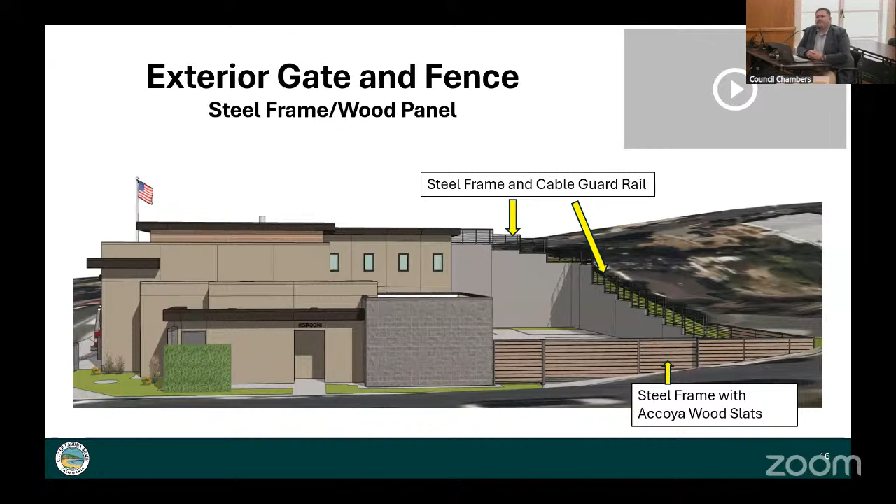Along Fifth Avenue and a short portion of Virginia Way is where we have the steel frame with the Accoya wood slats. This photo provides our detail of what that gate would look like. Unfortunately, I couldn't find a photo from the front of the gate, but this gives you an idea of what those horizontal slats would look like. There's a small gap in between each slat, but it is the steel frame. That is the proposal along Fifth Avenue and that short portion of Virginia Way.

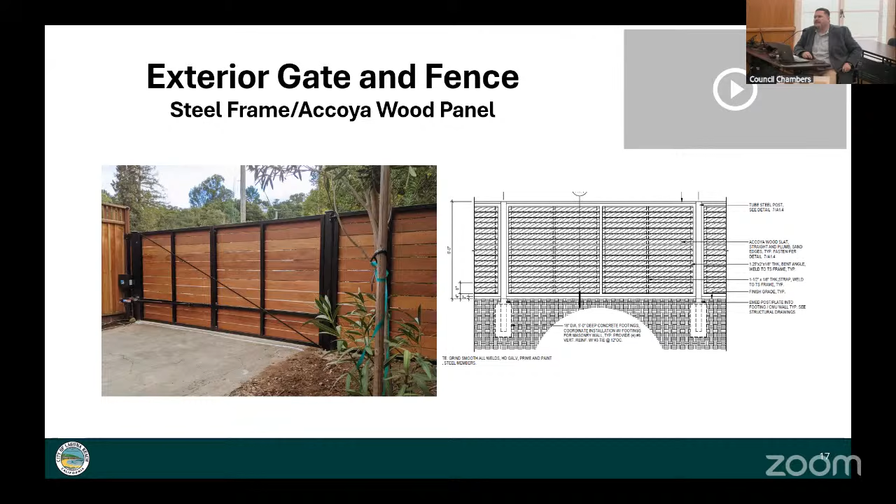Is this the same wood that would be on the building? It would be the same wood if we go with the Accoya wood. But this looks like a completely different color. It is, yes, I couldn't find a photo of that exact wood in this application. So this isn't an actual photo of the Accoya wood—this is more a representation of the horizontal slats with the steel frame.

The question on the proposed perspective view was about the way the aluminum siding was shown, and how that works along the edge of the building. So I was able to find this photo taken that shows that perspective view with the staking that was done on site. It's very hard to see, but I did point to it in yellow. I wanted to trace it, but I wanted you to also see that this was the staking. So we feel that view is an accurate representation of what you would see from that angle.

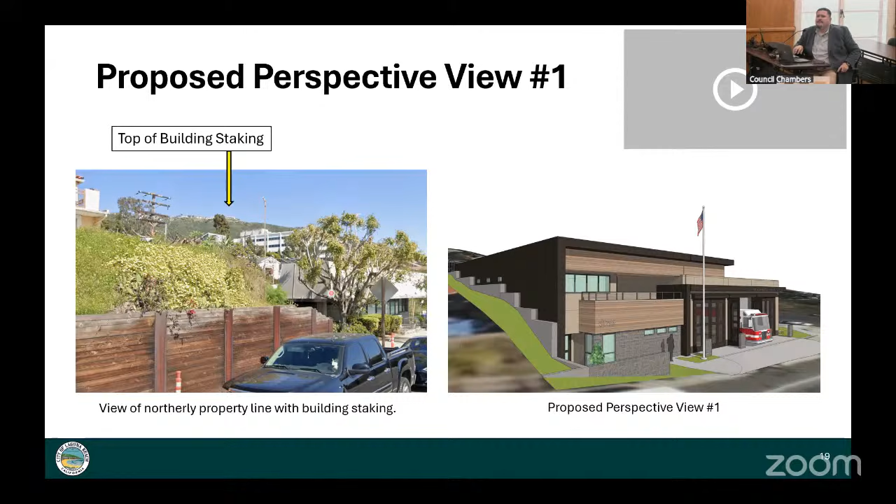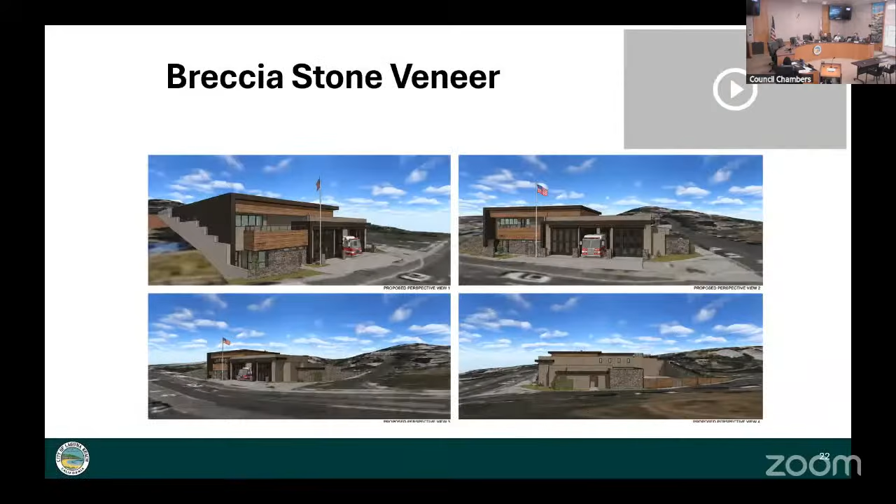Thank you. Questions from the commission? That was a very thorough presentation, Tom. I think you picked up everybody's comments.

I'd like to start with the landscape plan. It's very general. There's no spacing shown for any of the plant material, no numbers of plant materials in the plan provided, and in fact there's no landscape architect shown on the plan itself. So this is more of a concept review, and there's a lot of input on changing up some of the plant material, adding new species and deleting some of the species. In that case, what would happen in the process? Would the landscape plan come back to the Planning Commission?

That's a good question. As originally contemplated, it was left to the approval of the city manager. But I do understand, and I guess one of the things we're hesitant to detail too much is that there's still a chance for change depending on what that public art looks like. That's why we were keeping it general, to understand what that palette is and then further detail it. That was some of the hesitation about detailing it too much, since there's a significant portion that stands to change, that's not the design being provided by our landscape architect.

Among other things on the landscape plan, where is the water quality area located? It's not identified on the plan. I can bring that up. So that's in this little finger just behind and to the left of the gate into the back. Okay, so it's that little planting strip, and then there's the tree adjacent to it. And so is that intended to retain water? That's to meet our water quality requirement to treat the water on the site, so we would be draining to that area and then pump the water out.

Okay, I think you've raised a lot of good questions that we can get into discussion about, but those are my questions. Thank you.

Tom, in regards to the potential of changing from the block to the stone veneer, how does that affect the actual construction of the sub wall or whatever you want to call it? Because with the block, you don't have a separate structural wall, and I'm assuming with the veneer there would be a 2x6 or some kind of internal structural wall that the veneer would go up against.

Yeah, I think just because we are so far through the design, we would likely just change that to a precision block, a standard gray block, and then apply the veneer on top of it. So you're feeling that there's a potential of just not being able to have enough material to do all the replacement of all the split face block.

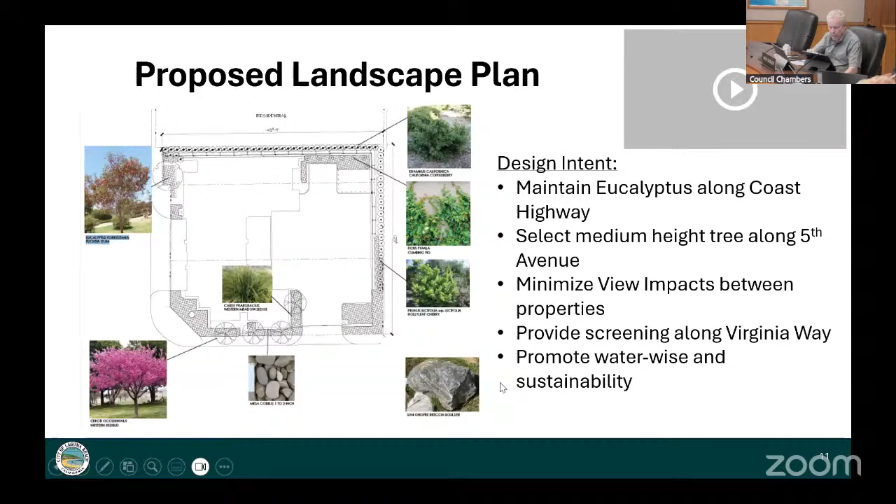Okay, and then I'm looking at - I'm not sure if you can bring this one up - but it's perspective view number 3, showing the corner of Fifth Avenue and South Coast Highway. When you were discussing the possibility of having some of this block with the real San Onofre breccia stone veneer on it, you were possibly suggesting maybe just doing it on that garden site wall, which, looking at perspective number 3, would be the one facing South Coast Highway.

But I'm wondering, looking at what's there on that elevation facing Coast Highway, if they were to use some of that stone veneer on that site wall, that garden wall, and also at the front door entry wall, and the other wall facing South Coast Highway closest to Fifth Avenue - that's not all block wall, but changing that front elevation so the block wall all has the veneer on it - do you think you'd be able to source enough to get those three expanses of wall covered with the veneer?

It would be speculative, but I could commit to having that be our primary goal. Okay, because I just thought maybe that would be a good compromise. That answers my questions. Thanks.

Commissioner Goldman, do you have some questions?

Yeah, I have a question, Tom. You've mentioned availability of plants as a potential issue, and availability of some of the materials. Is that related to what's going on in the world right now, that inventories of materials are diminishing, or is it just regular old supply and demand? In other words, is it an extraordinary potential for unavailability, or is it kind of normal course?

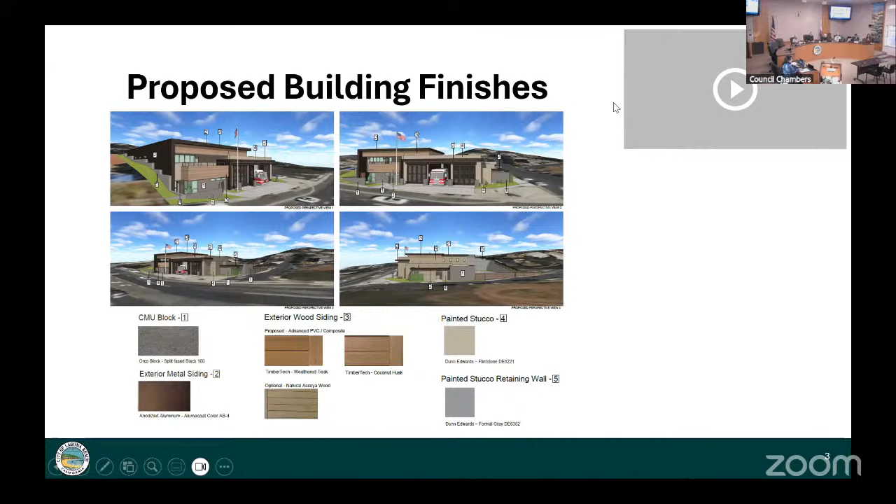Okay, well, I'd also welcome comment from the public on that. So we'll now conclude planning commissioner questions and go to open the public hearing and ask for comment from the public. Three minutes each, please.

Hello, James Henry, Vice President of South Laguna Civic, local designer, South Laguna resident. I've been involved with this project since its start, and I want to thank Tom for all the meetings we've had and the input that's been taken. I do think the building has come a long way, and I think we're at a point now where these final details are critical in helping to differentiate it from a building that might be in Aliso Viejo versus something that belongs in South Laguna. And I think we can do it.

I would say the breccia stone - there's a guy in town who was a big excavator, and he collected all this stone over the years. If you've been around old Laguna houses, most of the old walls and retaining walls are built out of this stone. It's used in the transit stops and light standards in our section of town. It would continue that fabric into the building. I think there's probably enough stone that we could make it work.

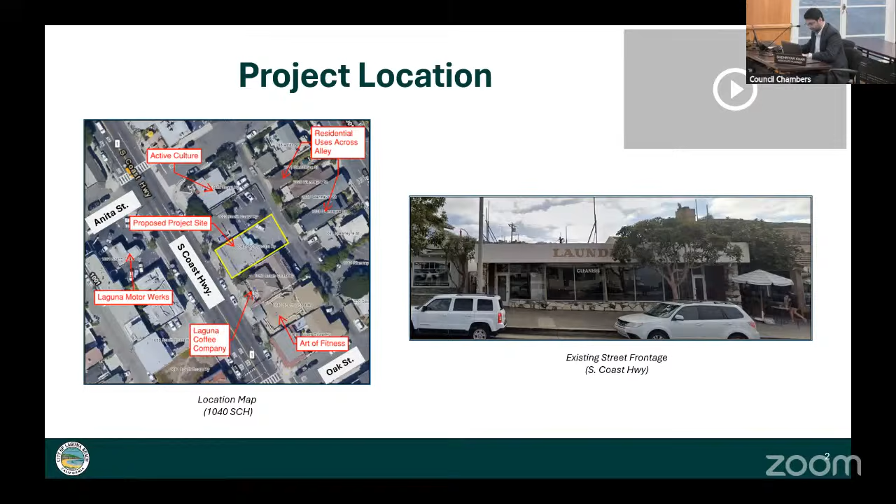The project has a history before the Commission. In July 2025, the Commission reviewed and approved Design Review 25-1044 and Coastal Development Permit 25-1045 for a mixed-use project involving a major remodel of the existing building, a second-floor addition with 4 one-bedroom apartment units, exterior facade improvements, elevated decks, parking lot upgrades, and landscaping. The Commission approved the project on a 5-0 vote on July 16, 2025.

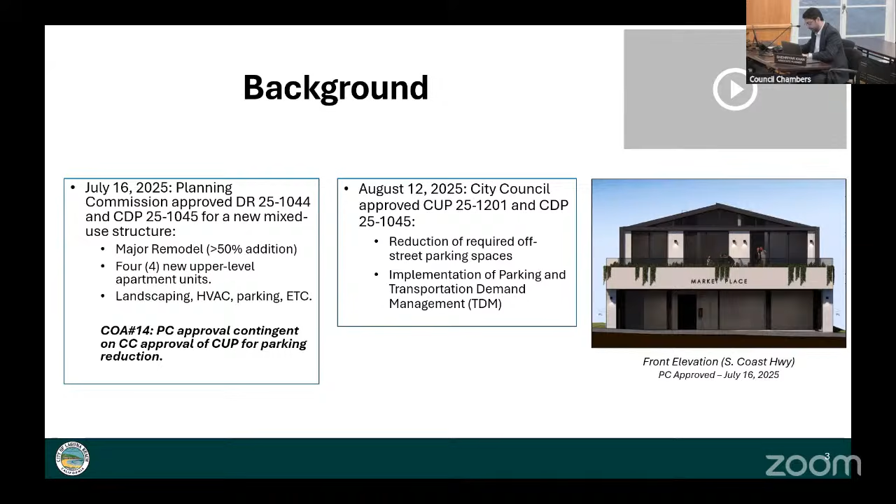The City Council subsequently approved the associated conditional use permit for a parking reduction on August 12th, 2025. These are the plans approved by the commission last July.

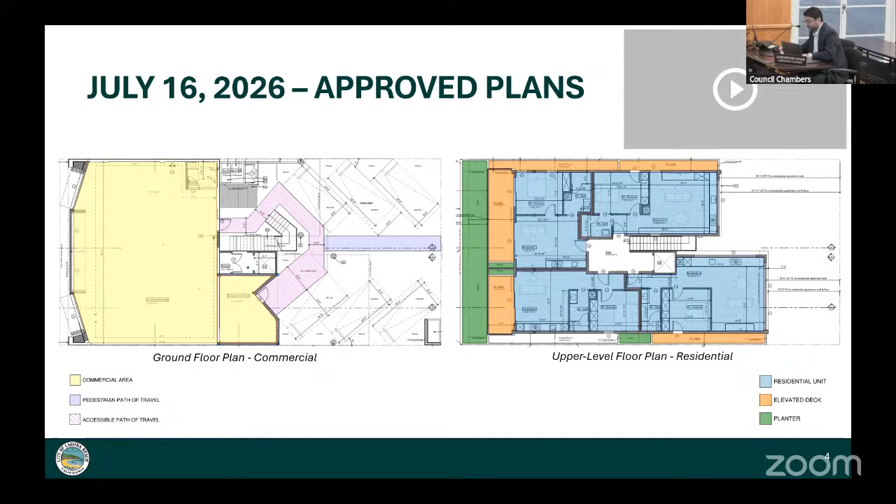The ground floor commercial area is 2,275 square feet, and the upper floor added 2,427 square feet of residential space, configured as 4 one-bedroom apartments with a combined deck area of 630 square feet and a combined planter area measuring 326 square feet. This is the baseline from which tonight's proposed modifications originate.

At the July 16, 2025 hearing, the commission directed the applicant to explore mirroring or flipping the upper level residential floor plan to improve privacy for neighboring residential properties along the rear alley. The applicant has followed through on that direction and is now returning with a revised design that implements the mirrored layout. This mirroring is the primary driver behind all of the modifications before you tonight.

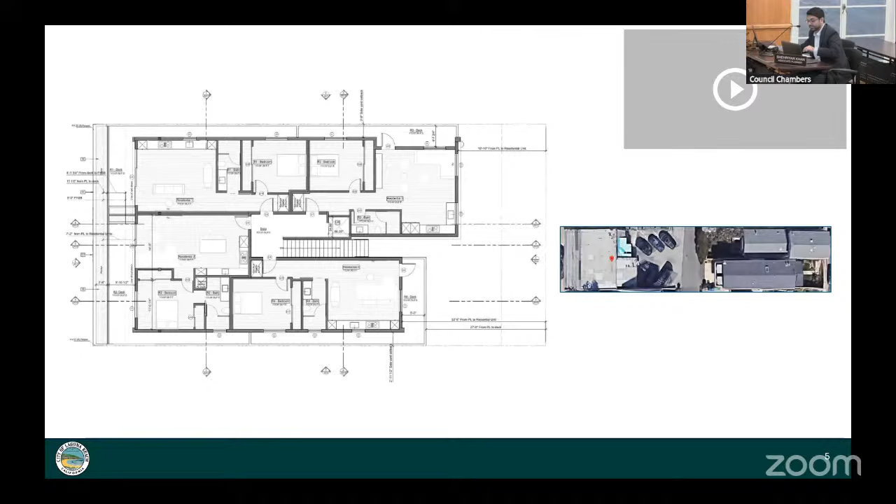Mirroring the upper floor required corresponding changes at the ground level. The accessible parking stall has been relocated to the north side of the site, and the accessible path of travel has been reconfigured accordingly. A new restroom has been added within the commercial tenant space, and the staircase and elevator have been repositioned to align with the revised upper floor layout.

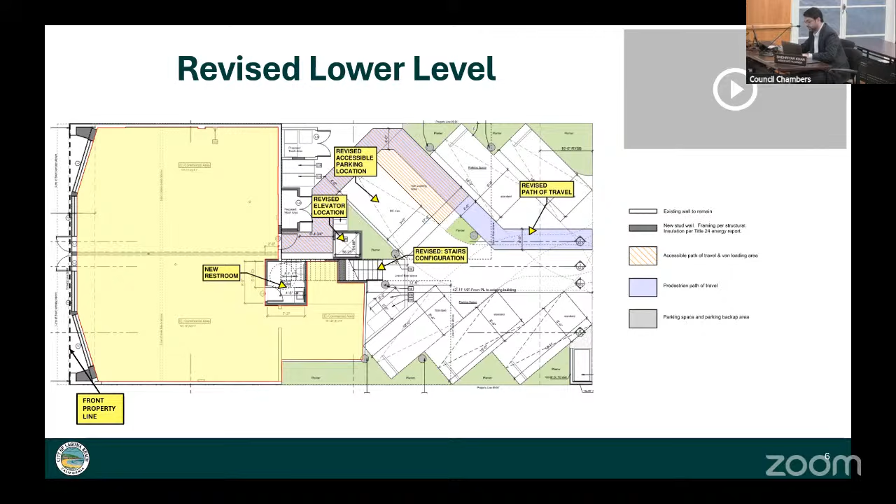The mirrored upper level layout results in several changes. Units 1 and 2 have shifted approximately 5 feet towards South Coast Highway. The combined deck area has increased from 630 square feet to 961 square feet, with expansions to all 4 units. Most notably, the Unit 4 deck has been extended along the rear facade.

The combined planter area has been reduced from 326 square feet to 118 square feet. Individual unit sizes have also been updated, with 3 of the 4 units increasing slightly in area. All modifications remain within the footprint of the existing commercial building.

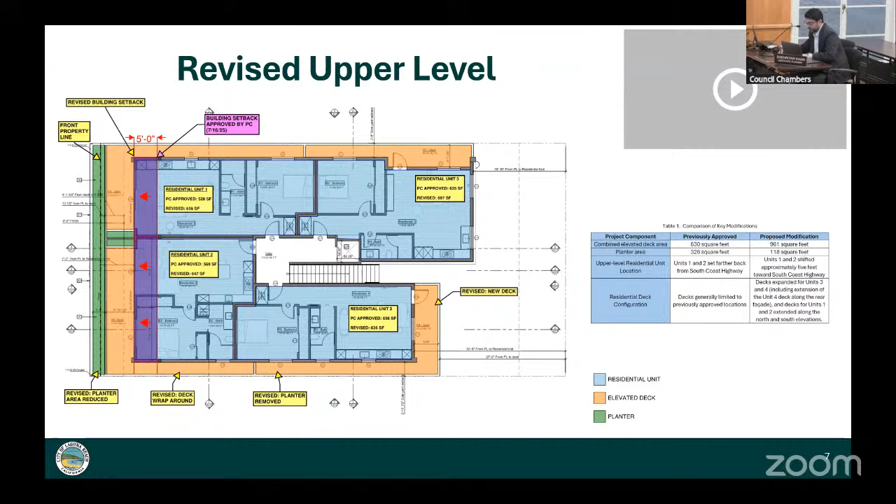The material palette features a medium bronze metal trim, revised from the originally proposed dark bronze in response to the commission's feedback last year, paired with an ivory painted stucco and a light gray stone veneer replacing the existing flagstone cladding. The street-facing elevation maintains corner-to-corner glazing at the ground floor to support a pedestrian-oriented commercial frontage.

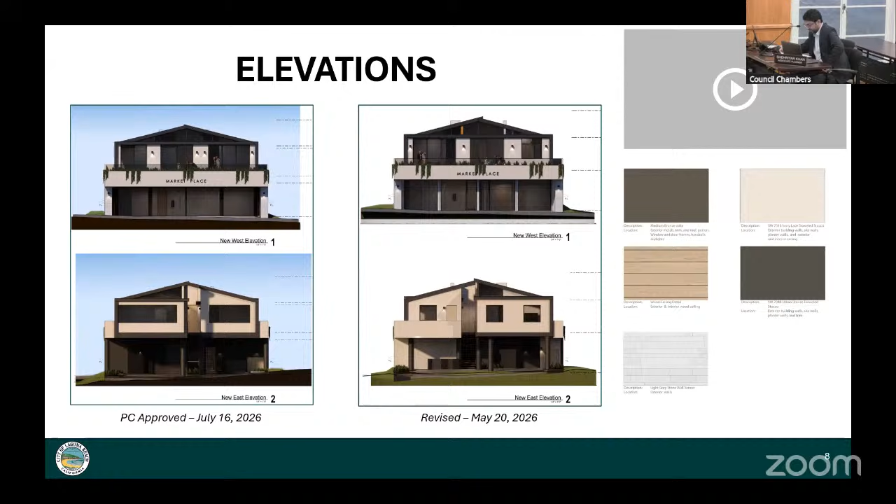The upper floor is set back from the front property line, with the decks located approximately 10 inches from the front property line. The rear elevation has been redesigned to reflect the mirrored floor plan, incorporating horizontal offsets and a projecting stairwell element that breaks up the massing along the alley-facing facade. This articulation directly responds to the Commission's privacy concerns and avoids a flat monolithic appearance.

The upper level addition achieves a similar overall height to the surrounding 2-story commercial buildings on the block, and roof-mounted HVAC equipment is centrally located and screened from view.

Since the publication of the agenda, staff received public correspondence from a residential neighbor located across the alley at the rear of the project site, raising view equity concerns. That correspondence has been added to the agenda and is available for the Commission's consideration this evening.

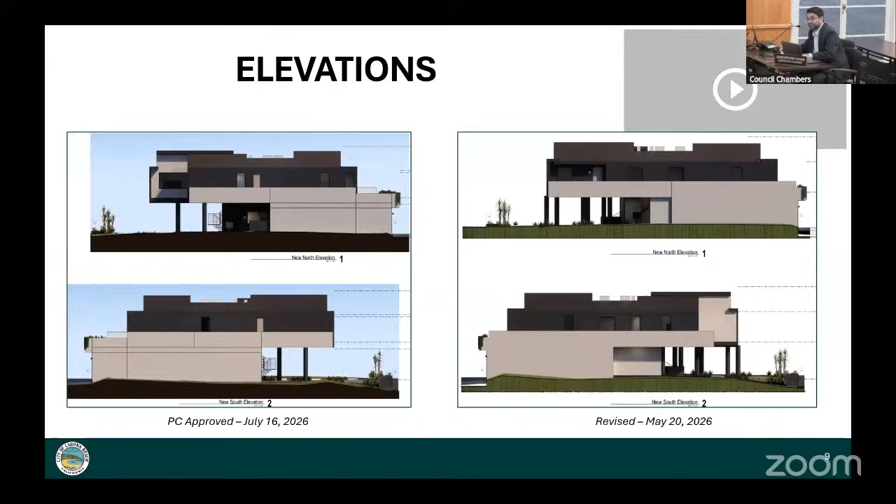Because the expanded decks and revised planter now encroach into the required front yard open space area, a variance is required under Laguna Beach Municipal Code Section 25.20.008C2. Staff finds that all 4 variance findings can be made.

In summary, the site's location within an established commercial corridor where buildings are already constructed to the front property line constitutes a special circumstance. The variance is necessary to provide residential outdoor living space consistent with comparable mixed-use properties nearby. The encroachment occurs entirely at the upper level and does not remove or reduce any existing publicly accessible open space at grade. Granting the variance is consistent with both the zoning ordinance and the general plan objectives supporting mixed-use infill development.

And it's an existing condition. Sorry? And it's an existing condition. Exactly. Minor detail. It's also worth noting that the existing building already occupies the entire front yard, so the nonconformity predates this application.

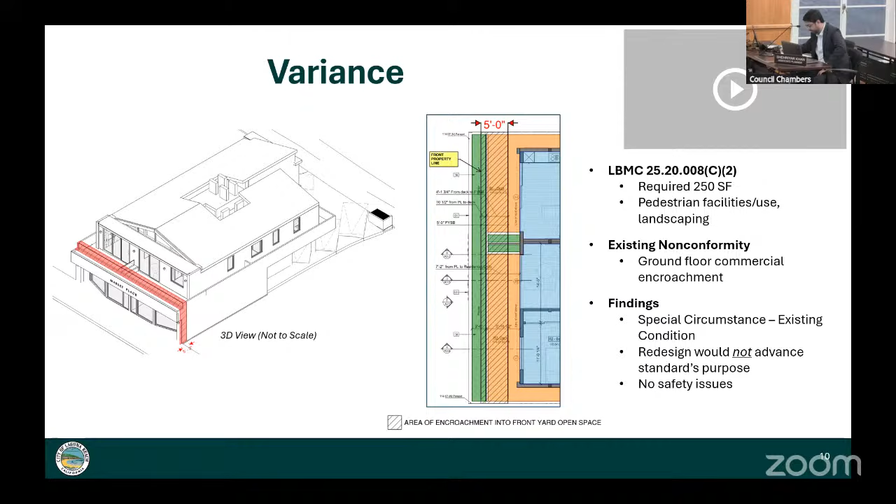Staff has reviewed the project and finds that all required findings of fact can be made for requested entitlements. Accordingly, staff recommends that the commission adopt resolution number 2026-0844, approving all three entitlements and finding the action exempt from CEQA under section 15303, new construction or conversion of small structures. This concludes staff's presentation.

I'm available to answer any question, and the applicant is also here this evening. Thank you. Commissioner, questions for staff?

Shouldn't an existing condition be exempt from needing a variance? Why isn't this exempt from needing a variance since the existing storefront is 10 inches from the property line? So the variance is still triggered because it's the new upper level proposed addition, which is now encroaching into this setback area, the front yard open space area.

So when it comes to the infill ordinance, it waives the requirement for a variance in the context of not requiring one to correct an existing non-conforming condition. But in this case, it's a new element being added on the upper level. Yeah, I understand that, but this would not ever be a public front yard. Exactly. So it's nonsensical.

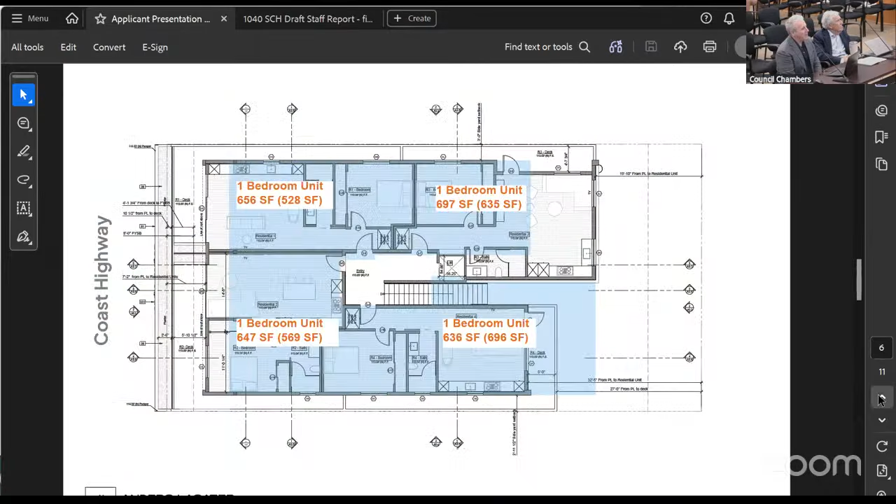I think we might be at the end, yeah. No, I think that's staff's way of saying you probably don't need to say a whole lot more.

What I wanted to point out is that we did flip the upper floor, which forced some reconfiguration, some juggling of things on the lower level. The elevator had to move around a little bit, which caused the parking to slightly change. We moved the handicap accessible space to the other side of the parking lot, but nothing that would have any substantive change to the project.

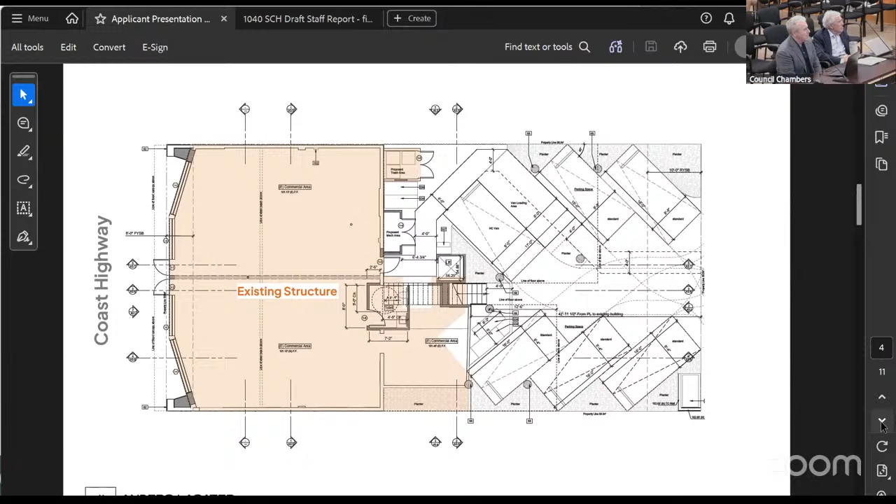Next slide. This was the original upper floor. Next slide, excuse me, lower floor. And this is the new lower floor with the original lower floor shown in that orange color. So truly not much has changed other than the location of the elevator.

Next slide. This was the original upper floor, and staff already showed this to you. The next slide will show the new upper floor with that blue area being the existing floor overlaid over it, and you can see how the mass flipped from one side to the other.

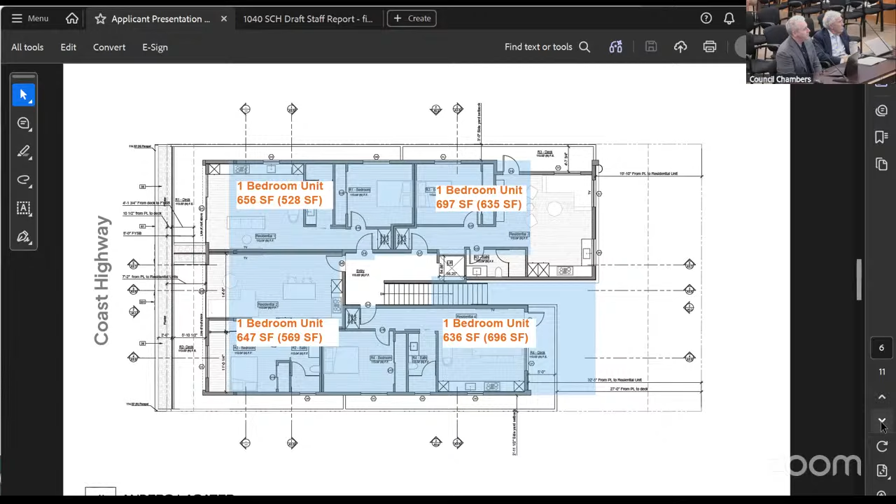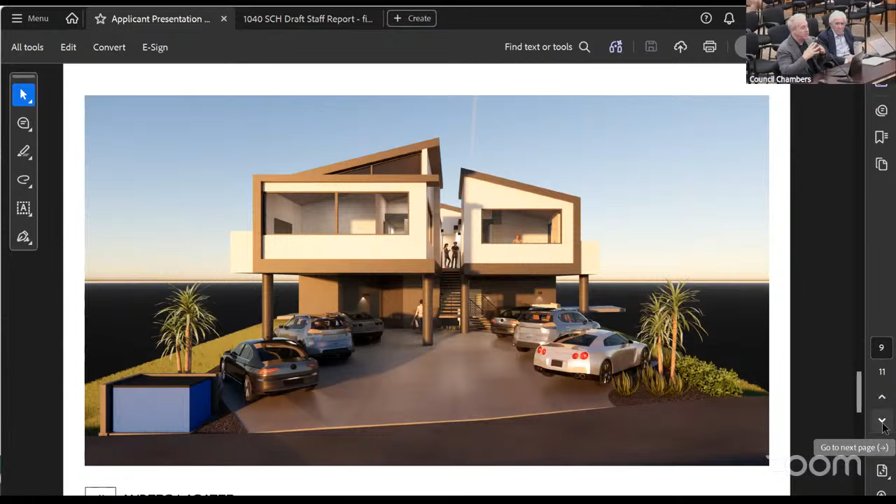The answer is no, it actually got shorter. There is a reduction in roof height because we changed the roof pitch slightly. By how much? Staff, would you agree it's probably in the range of maybe 6 inches lower at the ridge, if that? Just less than that, yeah, it wasn't a significant change. It was just a shift in the roof pitch, which brought it in alignment with the city's new code. That was something that when we first designed the building had not been in place. With this revision, it was pointed out that if we modify the roof pitch slightly, it would bring us into conformance with the requirements of the code. So we did that.

Next slide. That was the rear that was originally proposed. Next slide will show the new rear as proposed.

Next slide. In summary, I think what you're looking at is a more thoughtful design than what we had previously approved. Even though I loved what we got approved previously, this does reflect a little more of the pattern of development in the neighborhood, as Commissioner Whiten pointed out. Planning staff has been in great support of the project. It's now more neighborhood compatible, and the variance findings can be easily made because this project is neighborhood compatible, and there's existing precedent in the neighborhood for what we're asking for. With that, I'll ask for your support tonight and happily answer any questions.

I had a question. Here's the sentence I was talking about. After the city council got it, following the planning commission, they voted 5-0 to adopt the resolution approving the CUP and CDP with an added condition requiring that the occupants of the commercial tenant space comply with the transportation demand management strategies outlined in the RK Engineering Group report.

Wasn't that always part of the process, or what? I think we had some discussion about that when we originally heard it, and I can't remember all the details of the transportation plan, but I could speak to that. There was discussion about some of the requirements specifically laid out in the transportation plan that required the employees of the commercial space to follow that plan as well, and there was some question as to whether or not that is something that could be enforced by the city, or who could be the enforcement agent.

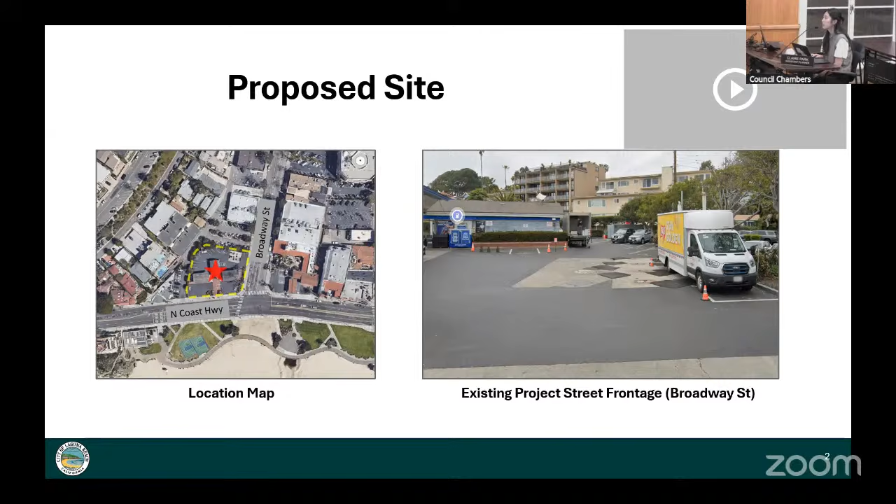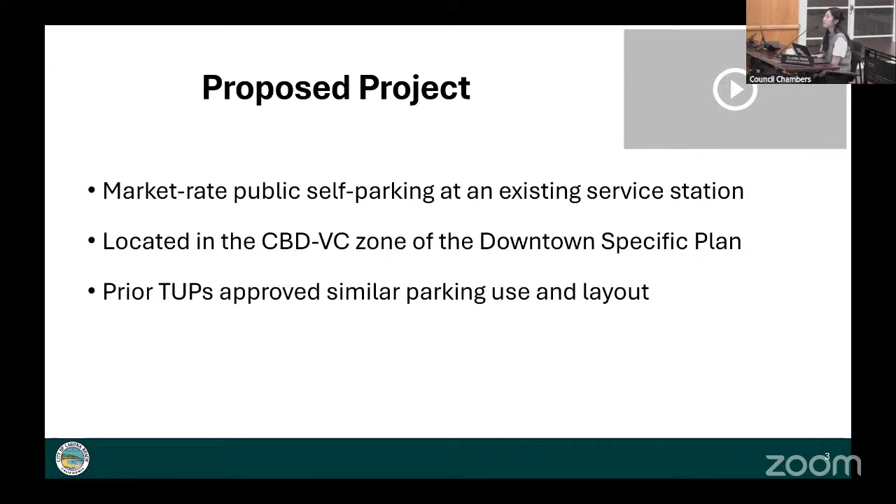Thank you. Item 5.3 is a request for a conditional use permit and a coastal development permit at 104 North Coast Highway. The project site is on the corner of Broadway and Coast Highway. The right picture shows the existing street frontage from Broadway Street. The proposed project is to establish market rate public self-parking at an existing service station. Prior temporary use permits have been approved for similar self-parking use and layout. The applicant is proposing a total of 30 spaces.

I'll go over the breakdown of the parking spaces. The pink spaces shown on the site plan are not rented. These are the 5 spaces dedicated to the convenience store, which exceed the minimum requirement of 4 spaces per the downtown specific plan. 8 additional spaces are for the fuel pumps, which will not be rented. While these 8 spaces are not counted towards the minimum 4 space requirement for the convenience store, they often function dually, as customers using the fuel pumps commonly patronize the convenience store during their visit. That leaves 17 spaces proposed for paid parking rental, consisting of 12 compact spaces and 5 standard spaces, shown on the site plan with green labels.

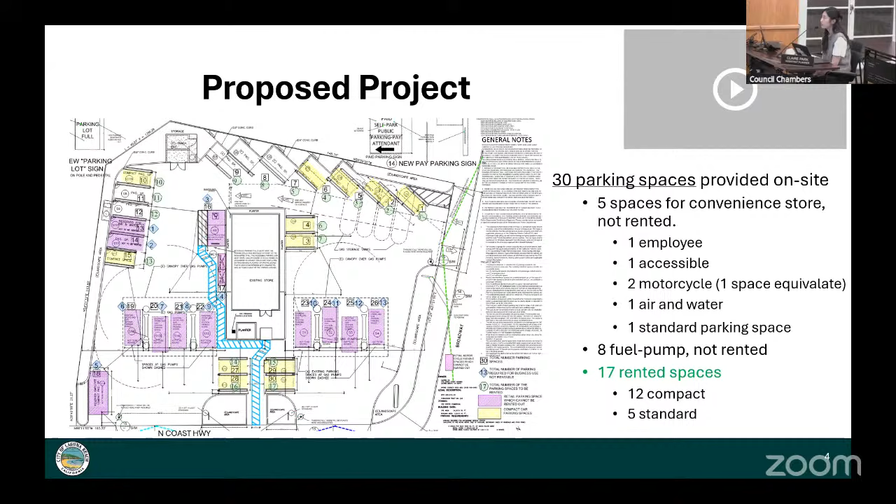Before we jump more into the site plan, I'll go over the property history briefly. This property has a history of this dual use for gas station and public parking lot for almost 12 years. The first TUP, 14-1215, was started in 2014, and the latest TUP, 22-2426, was approved back in May 2023 for 3 years, till May 2026.

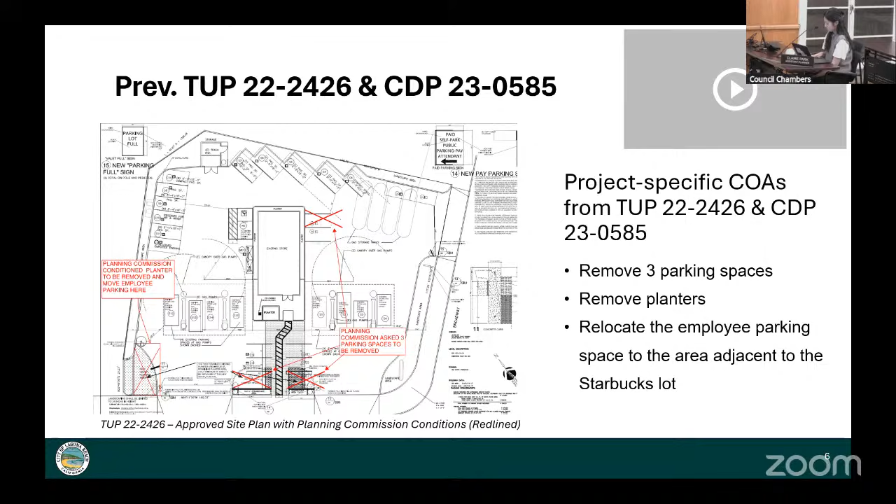In addition, Planning Commission requested the applicant to apply for a conditional use permit and a parking study to continue the paid parking use in the future. So this CUP has been filed, which is the project here today. However, applicant has requested a parking study requirement to be waived.

Given that the site has been operating for a paid parking use for several years without observed parking impacts, and based on inputs from Public Works, Code Enforcement, and Police Department confirming no issues during the last 3 years under the most recent TUP, staff recommends that a formal parking study be waived and that potential traffic and parking impacts associated with the proposed CUP would be minimal and consistent with prior operations.

Going back to the proposed site plan, as you can see, the site plan is similar in nature as the last TUP approved site plan. However, some modifications had to be made to ensure the project complies with all code requirements, as this request is now a CUP. Main changes are that the 2 parallel spots on the top right corner of the Broadway entrance have been angled to meet the minimum parking dimensions. They were previously parallel parking spots.

With these new angled spots, the city traffic engineer has also conditioned the corner to be striped to ensure proper circulation and traffic entering properly. Another change is that the employee spot on the left bottom corner has been enlarged to meet the parallel parking standard. And lastly, space number 4, circled in the middle of the site, has been reintroduced, which was conditioned to be eliminated in the last TUP, but this space meets the parking code and the minimum aisle dimension as well.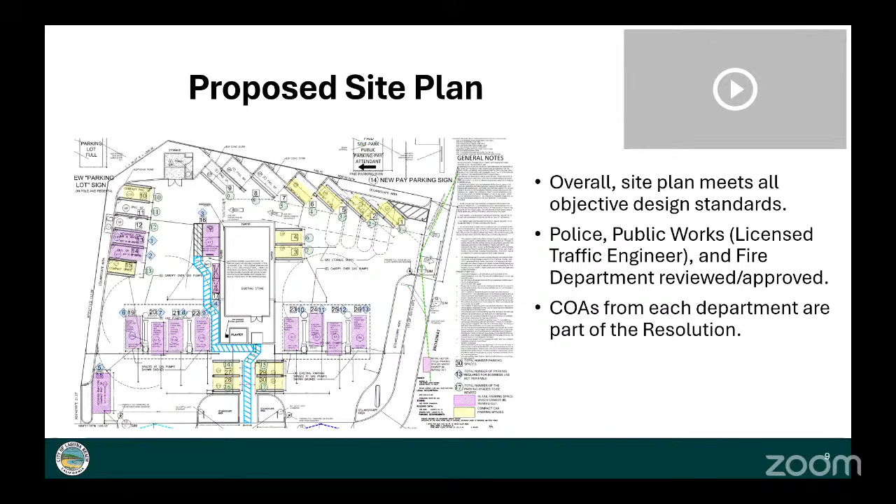Okay, and I think the big move here is to not have it come back every 3 years, to make it a permanent condition. That's really the gist of this. Actually, it's going to be like 2 spaces because one of the spaces got reintroduced and enlarged, and angled, but really only added one, I think.

Yeah, and Chair Kellenberg, I think the best way of characterizing the shift from the temporary use permit, which has historically been approved at a 3-year term, to the conditional use permit, is that the decision made here would last on the property in perpetuity. So not only were changes made to the site plan that meet the development standards on site that the temporary use might not have required at that point in time, because at the end of the 3-year term, the intention would be to go back to the existing or original condition.

With this project being considered, if it were approved, it would be allowed to happen in perpetuity unless it were revoked or abandoned. So that's the distinctive difference between what has been heard previously and what you have tonight. Thank you for that clarification.

And Commissioner Goldman, are you finished with your questions? Yes, I am. Thank you. My only question, you said this, so I just want to confirm it, that we've added another space, but Public Works and the police department are content with the current plan. Yes. Okay, thank you. And do you recall why the planning commission, the last time we approved this TUP, conditioned that space number 4 to be eliminated? Were we concerned about clearance and cars being able to navigate through there? Yeah, we were concerned about clearance. And nothing physically has changed to provide more clearance.

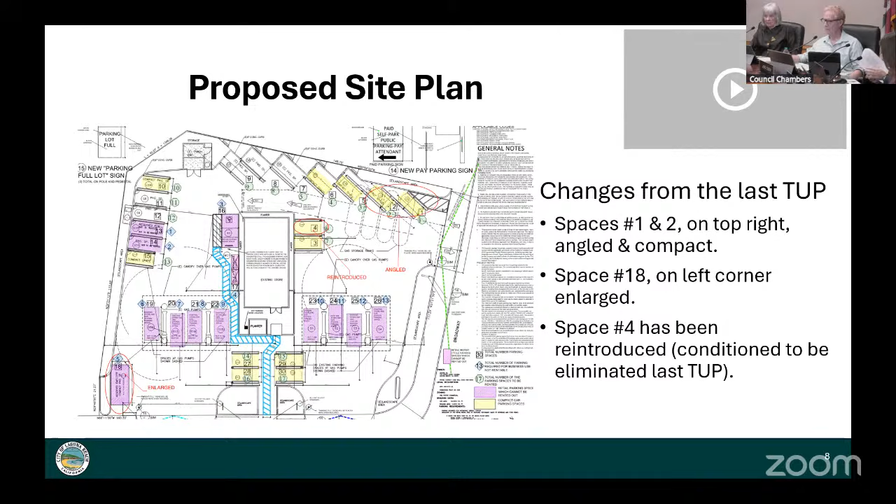Okay, thank you. Any questions for the applicant? Couple. So there's no new planters or any kind of landscaping involved in there? No. Okay. And has there been any issues with the staff working at the gas station monitoring the rental versus customer parking? Only at one space, and that's the employee space adjacent to Starbucks, and it's hard to keep people from parking there and running over to Starbucks. Otherwise, the rest of it works pretty well.

Okay. My only suggestion is with rental spaces 11 and 12, because of the location of the water and air station, if they were shifted to 12 and 13, it centers them more on the water and air station. I think it's not a big deal, but it just seems like when I looked at it, it kind of made sense. I don't see any real issue with that. Okay, we haven't done a building plan that says this is where we're going to paint the lines yet. So that would be simple to do. Okay, that's it.

Commissioner Goldman, any questions for the applicant? No. Thank you, applicant. We will open the public hearing. Is there anybody from the public who would like to speak? Seeing none, we'll close the public hearing and be ready for commissioner discussion.

Okay, go for it. Well, we've been through this a lot of times already. So nothing really too new here other than trying to formalize this into a more permanent thing. I'm supportive of it. You got some supportive comments from members of the community supporting it.